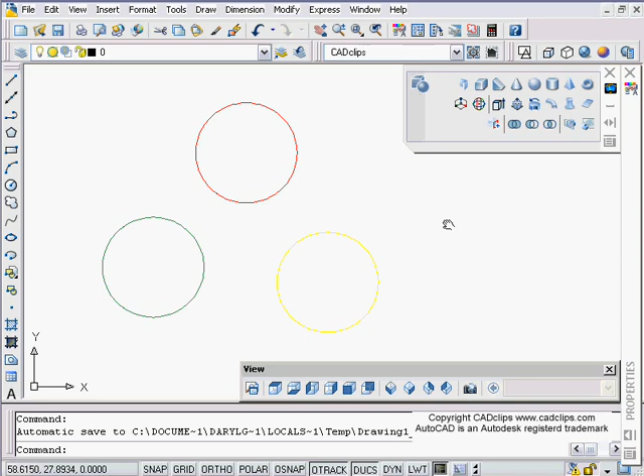I'll just get right into it. I've got some solids here. If I list this, I've got a 3D solid and it's a cylinder, and I've basically copied it 3 times, and all I've done is change the properties and color of these objects just so they stand out a little bit. Nothing fancy there.

Then I can go into a 3D view and change my visual styles as I please, and all I'm going to do is, using shift middle mouse button, orbit around here. I'm going to cause these objects to kind of interfere with each other.

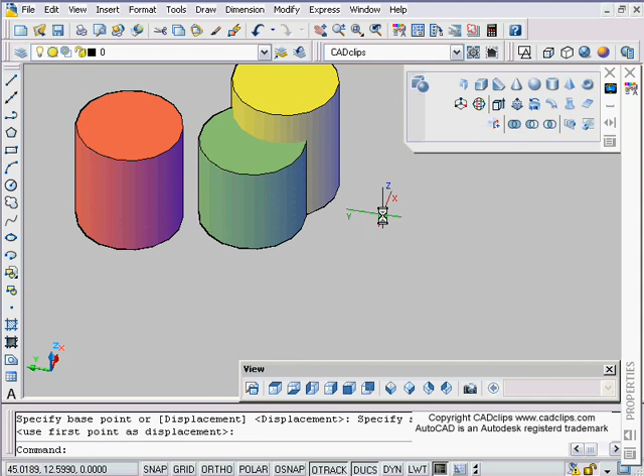So I'm going to take this, and now that I can do this in 3D and know where I am, I can say okay, I'm going to move that one over there, and then take this guy and kind of move that guy over there.

I can go back into my wireframe if I want, look from the top. I've got some areas that interfere. So all I can do is go back to a 3D view, maybe change my view to get something a little more conducive to the eye.

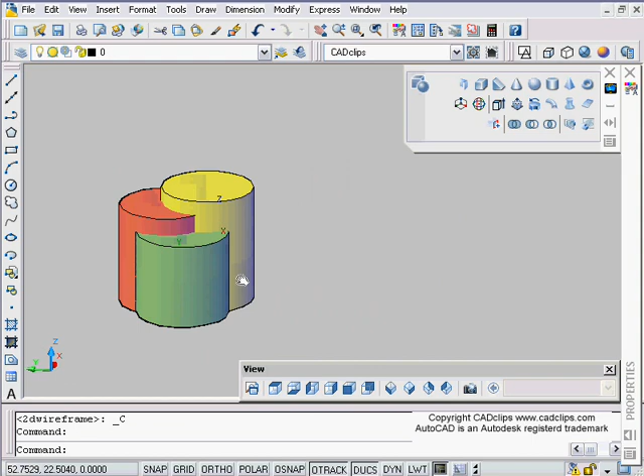Now I'm going to use my interference checking by starting off. I need to go into here, by the way, and expand this down. If you don't see this, there's our interference checking icon.

We click on this, we read our command line, and it says select the first set of objects. There's an S for settings, and we can type S and say how it's going to display. We'll see that a little bit later, and also it's going to show the visual style, how we want it to display.

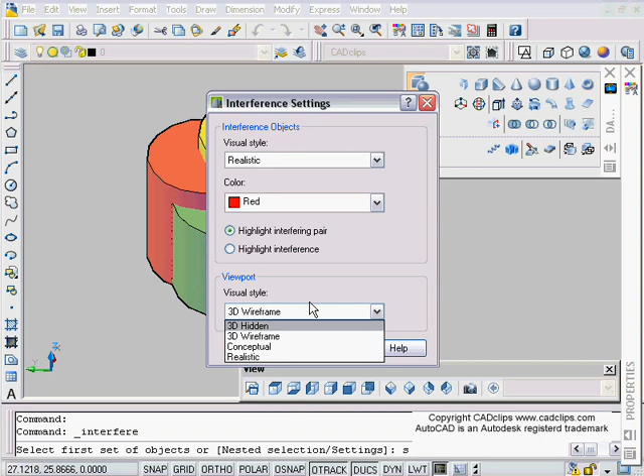3D wireframe is actually good, and you'll see why. So just a couple things there under settings.

All I'm going to do is pick this yellow guy and hit enter. Select second set of objects, it says. So I'm going to pick these 2 guys here and hit enter, and it bumps me into a wireframe, as I mentioned earlier.

And now from inside of here, I can pan this stuff around and zoom this around if I want. Maybe auto hide that.

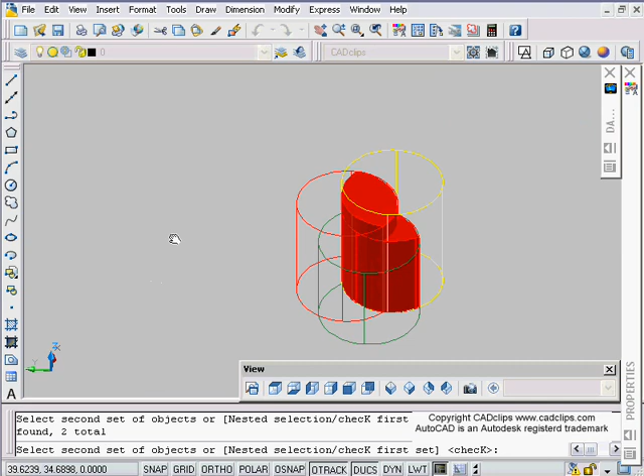As soon as I hit escape, my interference checking dialog box comes back, and now what I can do is say next and next, etc.

Zoom to pair. If I take the zoom button off, now what happens is, if I go back in here, pan, I can zoom out, move that off to the side, hit escape, and now when I go next, next, next, it's going to find previous, okay, those objects.

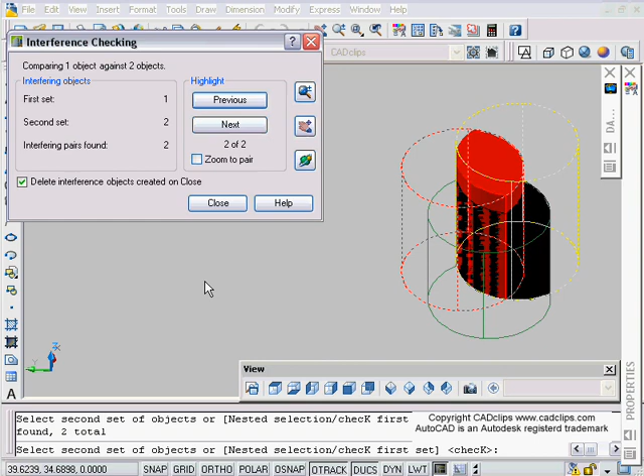Now when I close this off, it can make actual solid objects out of the interference areas. There's 2 sets of interference objects. So delete interference objects - I'm going to take that off, which means don't delete them, which means create them.

And then I'm going to hit close. And that's it. The job is now done.

And now if I say M for move and I hover around, guess what? I can move that one out, and then M for move again, pick and slide that one out. And those are my interference objects.

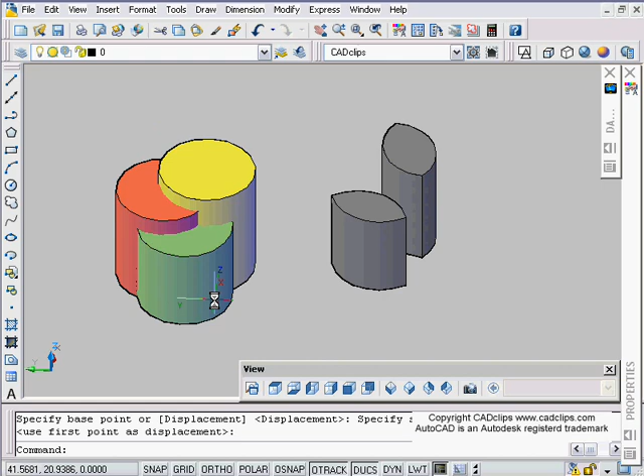So you can do that with all different types of solids. Back to my dashboard. Maybe take my auto hide off once again.

Now maybe I will pick this one, enter, and then I'll pick these 2 to compare, enter. I can get inside of there, zoom to pair, etc. Previous, next, next, etc. Use your zoom buttons over here.

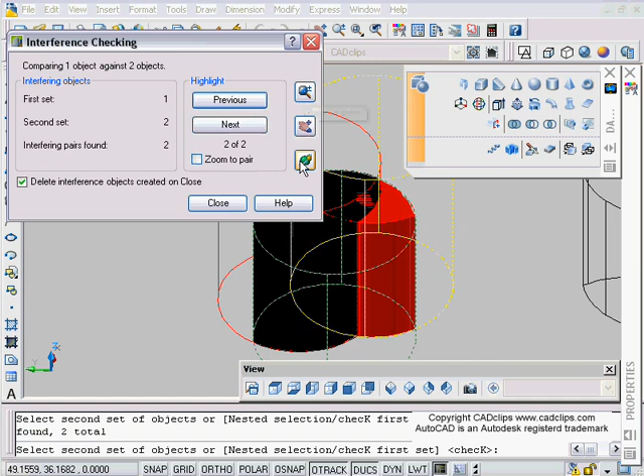It's not complicated. Take your delete off, hit close, M for move. Pick this guy, move him over, M for move again. Oh, and then maybe that's getting cumbersome.

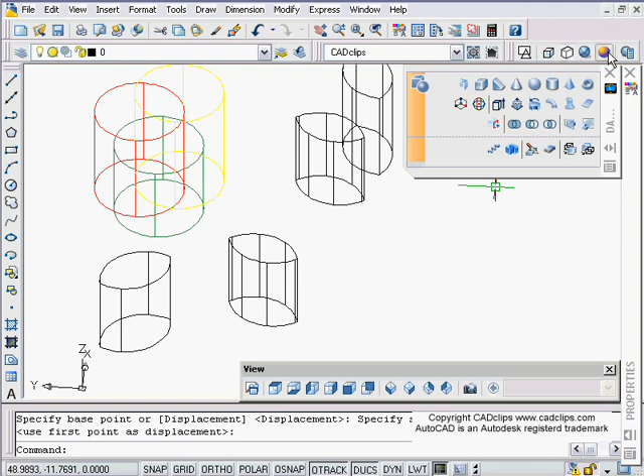I'll switch to wireframe, and then it might be easier to grab that little guy that I created, move him over there. So it's up to you how you do it. All it does is compare the objects, and it gives you 2 sets to compare, and then it makes the interference objects, and that's about it. Easy peasy.